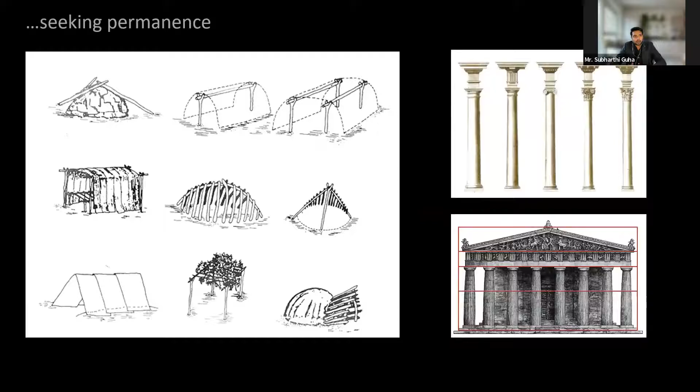So we have created these orders for different needs. For example, from Stonehenge as a monument, to the pyramids reflecting the skies in the way they're managed, to the Colosseum for entertainment, for resting places, for transportation, for houses. And we have moved along across ages trying to do that.

And therefore, it creates a presence in time for us. So I left high school and went in search of the new architecture, what it could be, which took me to some offices, including Charles Correa, Zaha Hadid, and my own. I'll take you a little bit through the journey of the work I've been part of.

As Gandhi once said, the best way to find yourself, or find what you want to do in the field of architecture, would be to lose yourself in the service of others. And that is how building works. You create it, but then it's no longer yours to inhabit - you leave it for the world.

This was one of the first buildings I worked on with Charles Correa, in Lisbon - a Cancer and Heart Research Institute. It's very cutting edge. I worked on parts of the design and helped with the 3D modeling. This was built after I left the project, finished I think in 2014.

When I joined, the office was completing a project like this in Glasgow, a transport museum. The ship is part of the museum, and it's a long, continuous ribbon, so to speak. We were also starting to finish some of the projects in Guangzhou.

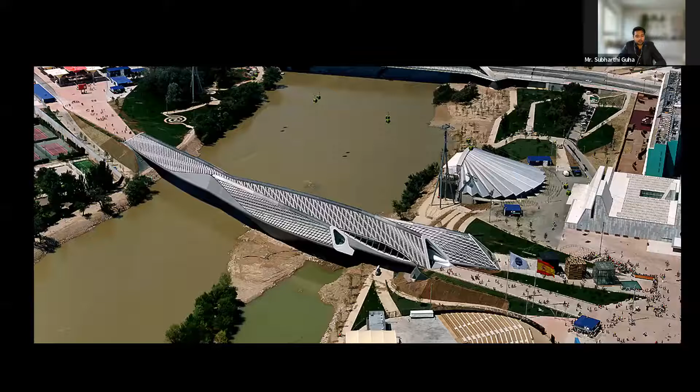This is the Opera House, and then habitable bridges - this is in Spain - and also train station entrances, this one in Innsbruck, Austria, and then the Cincinnati Art Center. So these are some of the projects that were going on.

Simultaneously, there's a factory where the white collar and blue collar workers - the people who work in the office and the people who manufacture the cars - can see each other. It's not separate. That was quite interesting, very different from how we saw factory people and office people as separate entities.

Towards something like the MAXXI Museum, which was very highly appreciated, built in concrete in Rome.

And the Olympic Aquatic Center in London in 2012, built for the Olympics. This is the interior where the event was held. Today it's open to the public and anybody can go there and swim, which is a good use of nice buildings created during a time of an event.

Also things like this, an office building which is a port authority in Antwerp, like a jewel on top of a heritage building.

And also some small projects like the Serpentine Gallery, where the column and the light coming into the building integrate as one piece.

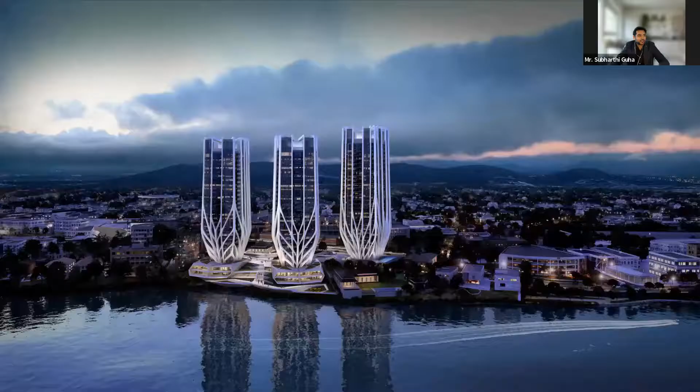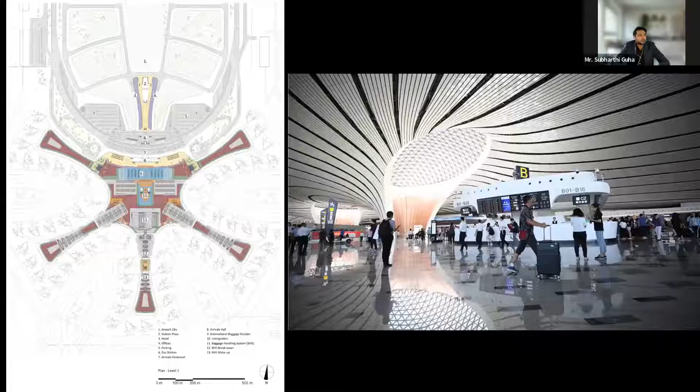And also projects like this, housing which I was part of in Brisbane, and an airport we recently finished in Beijing, the Daxing airport, one of the largest airports in the world, with internal light coming through the columns.

It can be seen in a much larger scale here - that light, people, and the surfaces all behave as one entity.

So, saying this was a glimpse of what buildings can be like in different types, shapes, and sizes, I will go through some projects on how we can build this.

One of the buildings I was part of was in Milan. This is a tower, so there are 3 towers, and we were only working on the tower on the left. The tower is designed with a twist, based on a rotation which is unequal.

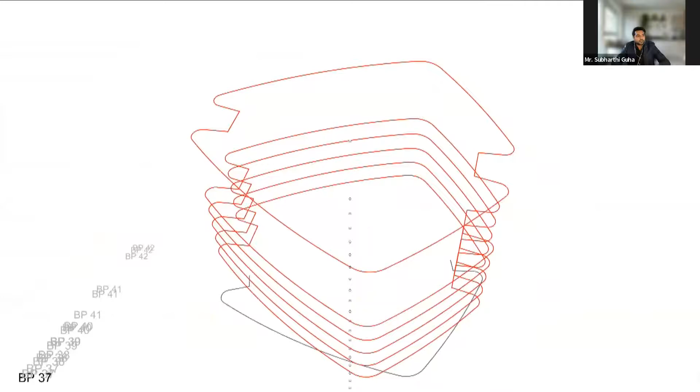As it goes up, you'll see a short video showing how the curves of the growth of the tower, of the twist and the floor plates, are assigned. This is the vertical points, how we distribute it, and then we create these floor plates based on the radiuses, and the whole tower is generated out of that curve.

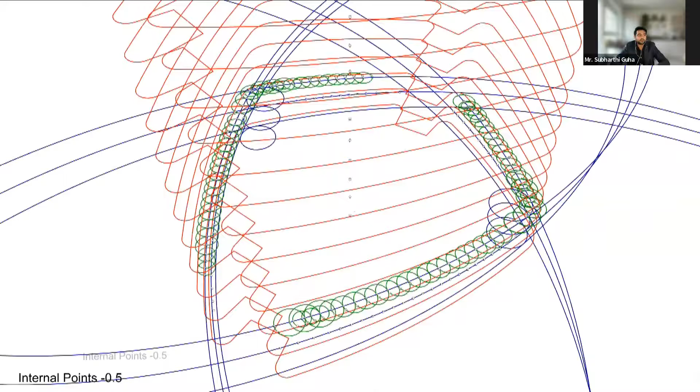I'll let this video run and talk through the technical bits - this is how the glass has been divided. Because every floor plate is different, we try to optimize and make it feasible so that not every glass is different, but we have as much repetition as we can.

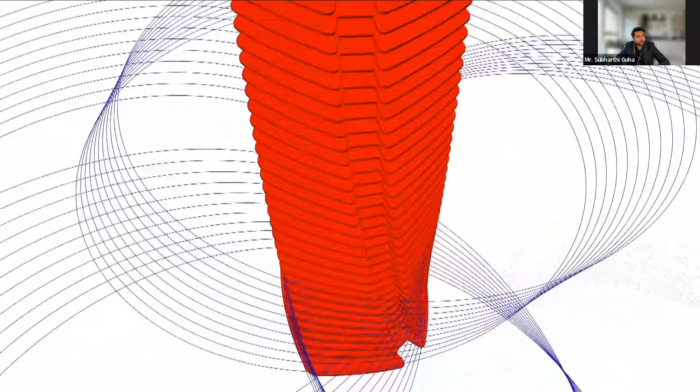So this is all the number of glass points that we would have, and then we start having the floor plates, the 4x4 floor plates. Next come the components of the central concrete columns, and then we have the columns which are inclined - floor to floor inclined - and they build the outside structure.

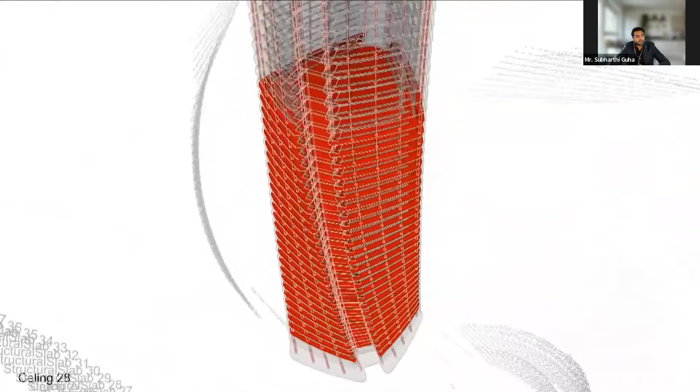The center structure is obviously a core. We also try to rationalize the chill beams, which are for the air conditioning in the building, and then the ceilings of every floor, and together we have...

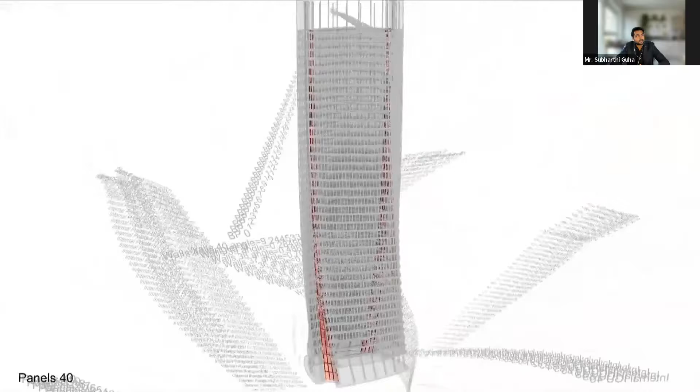Now we start building the facade. There's a first layer, which is the fire seal, coming all the way to the top, closed with panels of concrete on both ends. Then we have a second layer, the single layer glass in the middle, and lastly the outside skin, which is ventilated, reducing the impact of solar gains by having this double skin.

So this is, let's say, the building, and we'll go in a little bit closer. You can see the two skins and how the maintenance happens in between them, and the inside is offices.

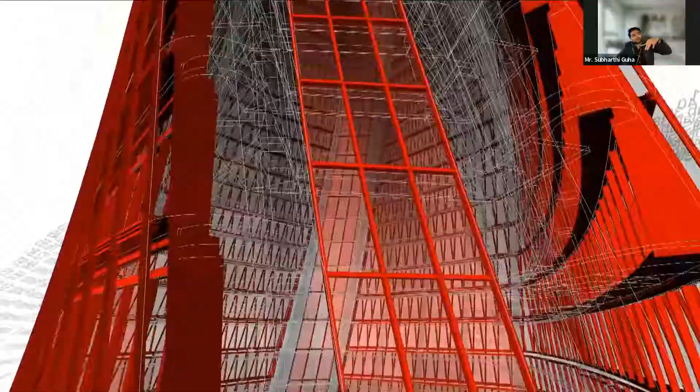So it's a good glimpse of how much detail and work goes into one of these buildings. I thought I'd show you that we took an axis, a metaphorical axis coming from the center of the city, and then you arrive in the first entrance, and the axis is picked up and disappears.

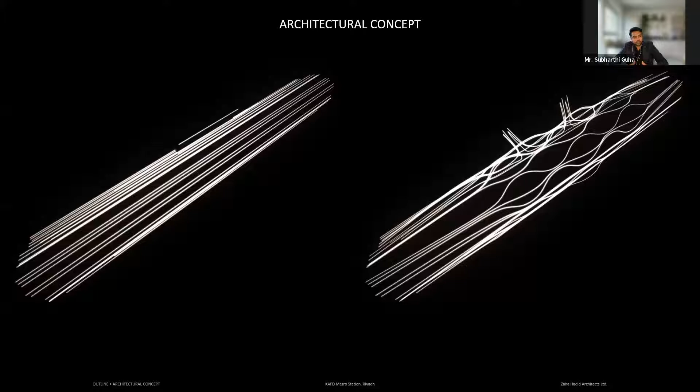But moving on, there's a second building, which is a train station. So we had a vertical building, and now we are dealing with a horizontal building where we have a train station on a very narrow site, and we wanted to give more space. So as you go up, it starts opening up.

This is a competition we won in Riyadh, and I worked on this project for a few years. As you can see, these are some of the initial designs of the entrances.

It's very tight, so you have two layers of trains coming in - one that goes to the airport on top, and one that goes onto the metro. Then you enter on the ground level and have an interchange level, and in some places, when you don't have the trains, it opens up into this large entrance.

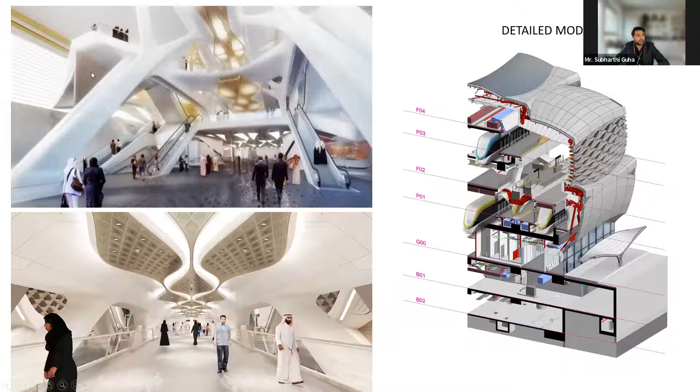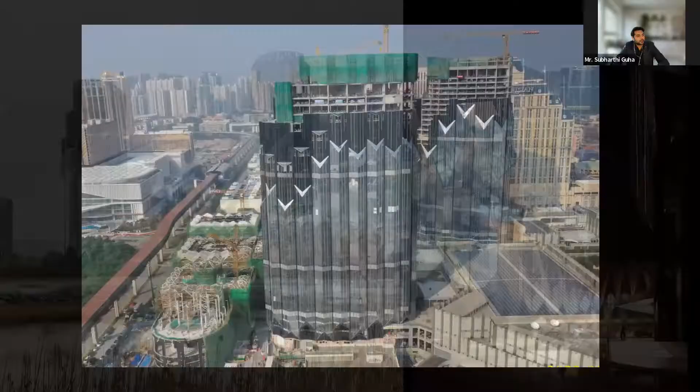Similarly, there's a short one here. This is in Macau, also currently on site. It's a 5-star hotel, then a 4-star hotel, and then a water park. Its whole concept is based on folding. So it's a commercial project, but at the same time we try to do something very origami-like, as a theme. This is one of the construction pictures of its current state in Macau.

Moving on, I think after doing all these projects I started to think about a journey for myself as well, to explore a bit further. So I opened a company and started building with one of these projects, this being one of the first, where this lady is sitting in a place designed not for sitting.

She's just enjoying the sun in Delhi on a winter day in front of an artwork. The building we designed is part of a temple complex. You approach it and you don't see any door or windows like we're used to seeing in most temples. So it's very quiet.

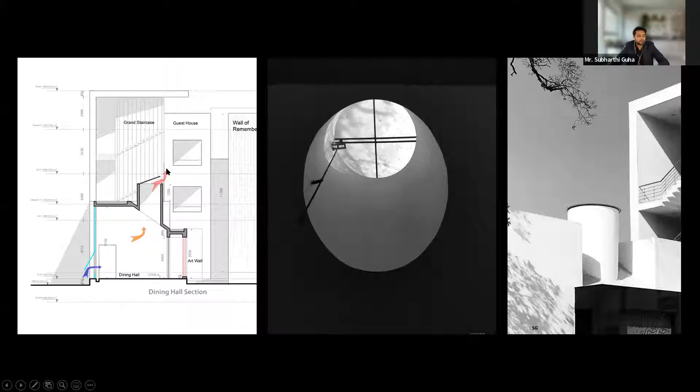It gives a sense of quietness. I like that. It also deals with climate. You have the air coming on the left, which is cool because of the shade, and it goes out through this chimney, which is also part of the architecture on the right. It's a natural passive cooling system. We designed it, we built it.

Next project I will show you quickly. It's got a voiceover, so I'm going to be quiet—you can listen to it. It's in Agra that we built.

Look for constant inspiration in nature, studying the continuity of its curves and the complexity of its surfaces. Translating such forms into buildings is a challenge. High-end computation can make it simpler to analyze and construct around the world. Forms with structures that are proud to reveal themselves. Forms that create new lived spaces.

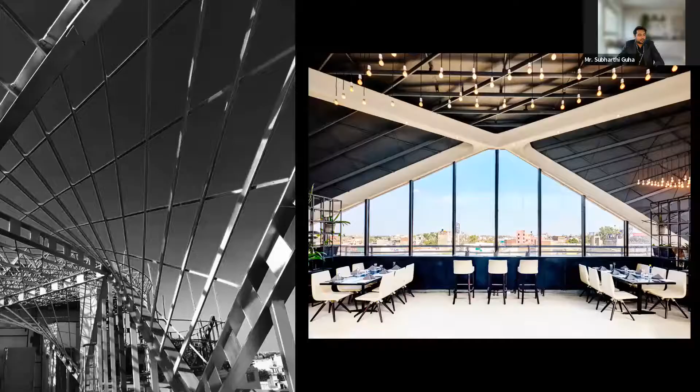So that was the project. You saw how we developed it from inspiration from a leaf into a 3D model, into technical computer-generated models, to finally building it on site. These are some of the pictures. Again, you see it's a little bit different—it does not have a false ceiling, it does not have windows like you know them. It is different in the way we see buildings as transparent, solid, and sometimes in the middle both.

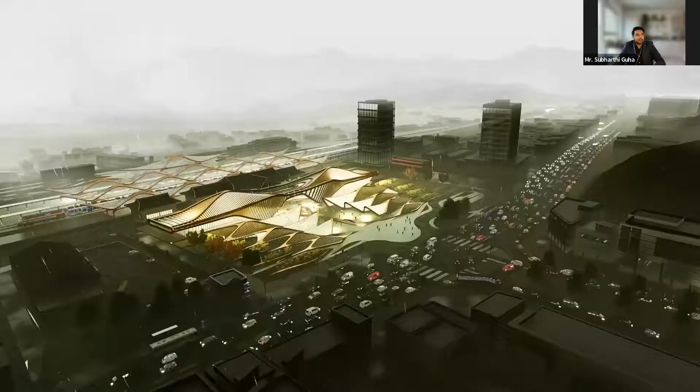And we go into much further details. We go into branding and we go into showing that everything is integrated, from cards. We also participate in competitions.

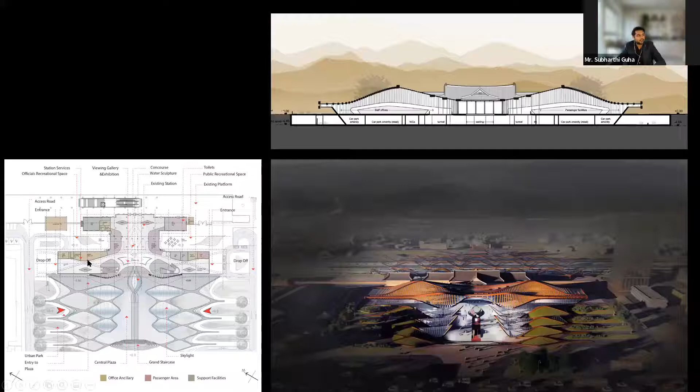We started participating and won—this is in South Korea, where we won some prizes. It's a train station again, but the idea was to think of these hills in the background that you can see in South Korea, it's very hilly. The idea of the geometry was replicating the hill in section, in plan, everywhere, so it's seamlessly connected to its nature.

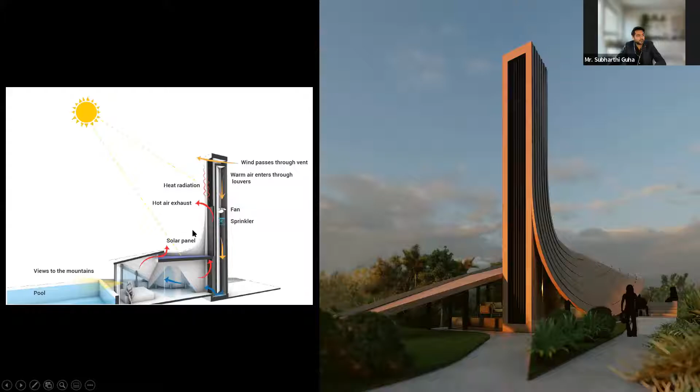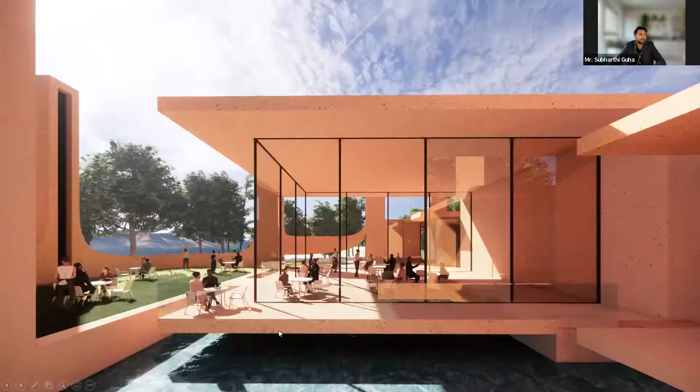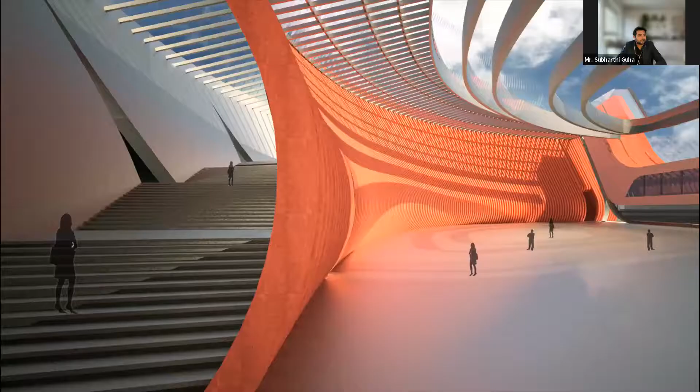Then we look into how art also translates—an exploration in sketches that kind of build something like this, which is a house. Sometimes we look into the night sky, where I started in the first few slides, and we develop a kind of vortex, a canopy. This was in Hisar, and we participate in other competitions like the National War Museum here.

This one is in the UK, a community center shaped like an albatross with wings spreading out like a bird. So this was mostly about the architecture I wanted to talk about, but I want to tell you there is a bit more, and beyond architecture as well, that you can explore in this field.

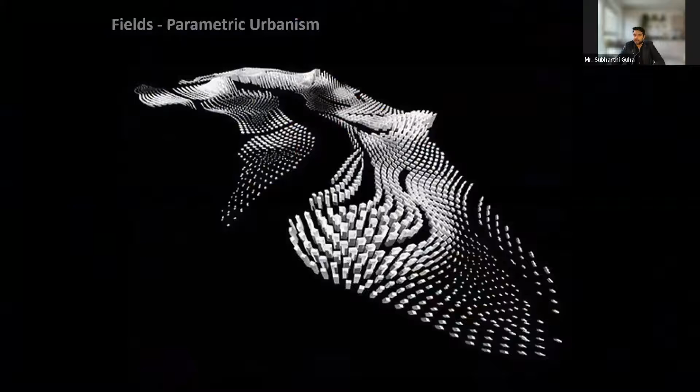You can talk about some of the work that was going on at Zaha Hadid, which was looking into the city, seeing the city as a model, and how the densities can be distributed in the city as a parametric model, which was then realized in the One North master plan in Singapore. And then also something like this, which is in Tallinn, a port master plan of smaller scale.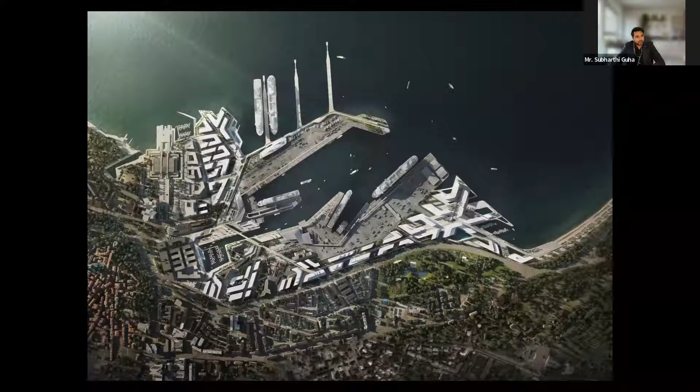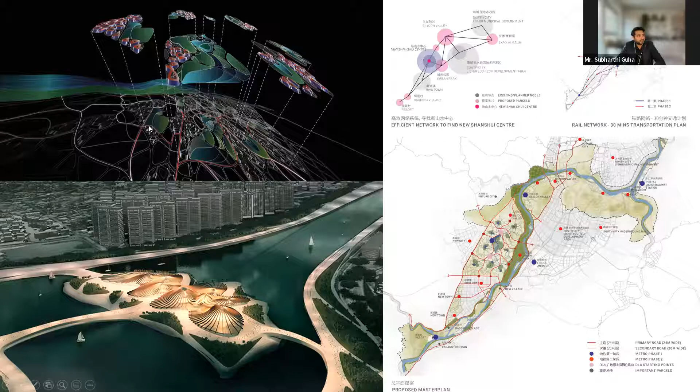And then also my personal interest in cities, we participate in competitions using space syntax, and we competed against Herzog & de Meuron and won the creative prize. This one is a 154 square kilometer master plan in Lishui, China. You can see the overall master plan and how we prepared it. It's beyond buildings, it has much more complexity, transport, and we believe in growth as polycenters, and also how we can create icons at the city level.

So thank you all for listening. And this is me. If you have any questions, we have Instagram and website and all that, but I don't think it's the end. It's a continuous journey, so I think we should all continue towards it. Thank you everyone for listening to me. That is all from my end.

Thank you so much, sir. It was reassuring to know that we are all trying to find order in this world of chaos. You've got us hooked with all the spellbinding buildings and with your architect's point of view, an insider's point of view. Thank you so much, sir. I'm sure it has benefited all the attendees.

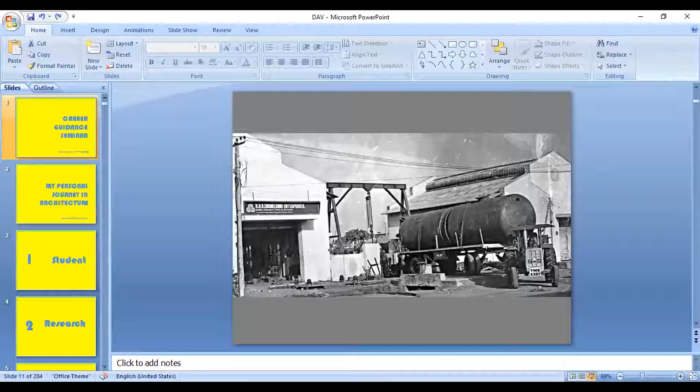So that's what I was just going through. I'm going to talk about different facets in my life and how my personal journey with architecture has been. To give you a little background, this picture is from the 1800s, and it has my grandfather and my great-grandfather in it. I come from a family of craftsmen; our family was involved in making chariots, so we were well versed with working with different materials, say metal, wood, and so on. My father was lucky enough to go to college, and in 1976, he started this factory in Ambattur Industrial Estate, very close to your school.

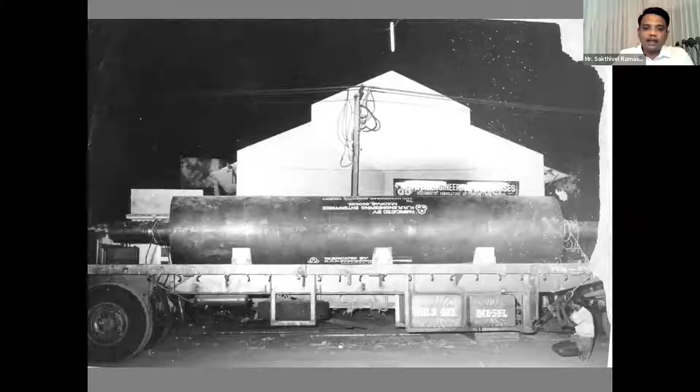These were the different projects he was doing around that time. These were a bunch of very hardworking people doing unbelievable things in engineering. That's my father, who started the factory, and it became a really international organization even at that time. From 1976 to 1996, within a span of 20 years, he won the presidential award. So this is the kind of background I came from.

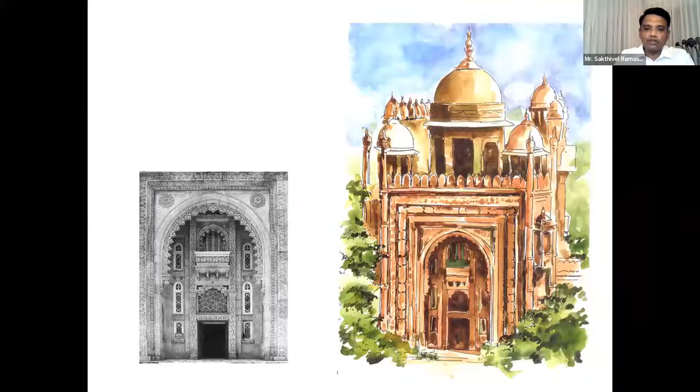As a student, I was really interested in art, so I was very reluctant to even tell my parents that I liked drawings and paintings. I used to go around Chennai painting buildings, go to museums and observe sculptures, and I was part of my workshop. I saw a lot of relatives working with craft, which influenced me a lot. I was also really interested in photography as a young student, walking around with my camera clicking pictures. So I was seeking where these interests could culminate and where it would take me.

That's when I joined CEPT University, Ahmedabad, and that was a real turning point in my life when things started changing, and all my creative urges started to come out and make sense.

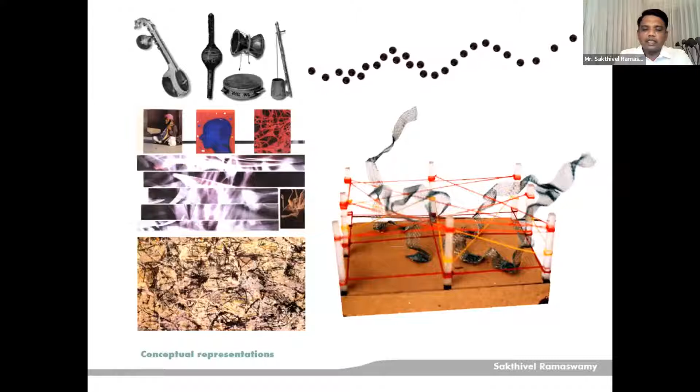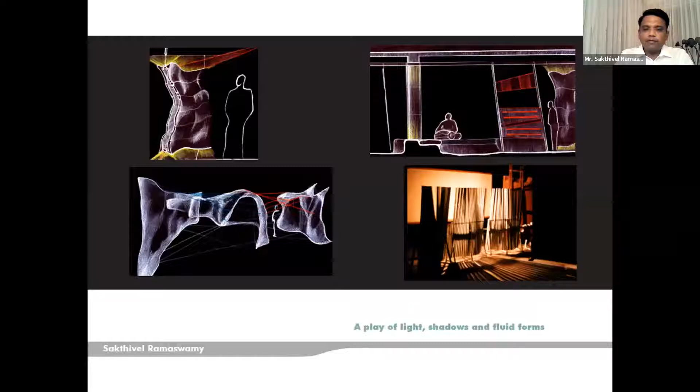I want to talk about a little project I did in college. I'm going all the way back because as students looking to do architecture, I think each journey is important. This is a project where I had to design a showroom for music instruments. We put together a concept board of how music influences our mind, and these are the drawings that were put up at my final jury presentation. I was visualizing the space to be very fluid with a very ethereal feeling when you walk into it. These were the drawings I did as a third year student in architecture.

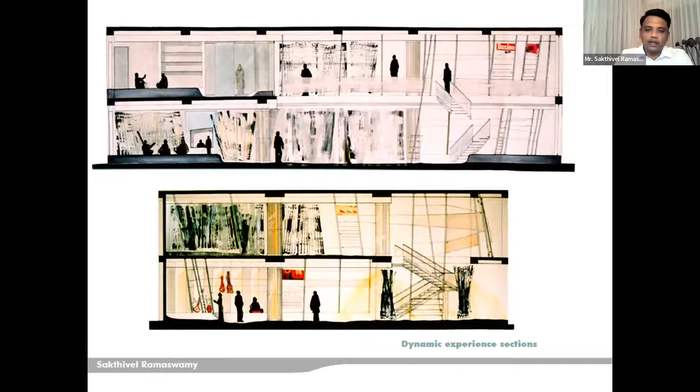These are some of the sections. The concept of the store was that there would be walls which are fluid and which can move with music. So I developed a complete full-scale prototype of how this wall would move with music. This is where I saw there was a huge information exchange - my engineering background and my craftsman background helped me do this in school. This was a really well appreciated project at that time.

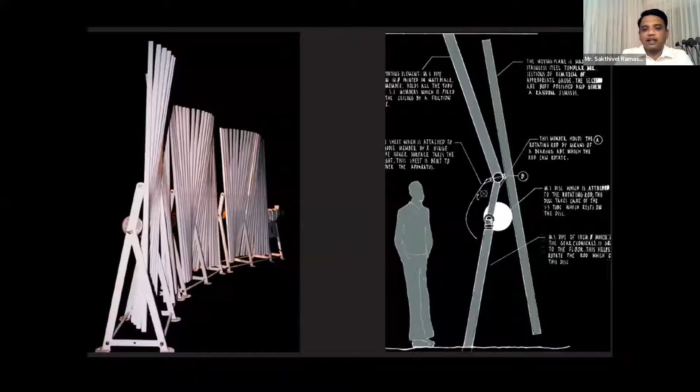So there was a lot of influence from my background. These were the images of the facades at that time, and this is the image of the wall that could move. The whole wall was engineered and done with the frequency of the music - the wall could actually dance along with the music. That was the concept. So from there on, I went to do my master's in London.

I did this course called Emergent Technologies and Design. Talking about research, when I was towards the final years in my undergrad education, I got really interested in how nature influences architecture, how nature influences design. So I delved a lot into the subject.

As much as I was trying to seek more meaning into how nature works, how nature can adapt, how nature is smart, and how nature is efficient - all this led to furthering my research even further, and I published two books. One was called Biomimicry, and the other was called Fiber Composite Adaptive Systems.

To touch upon a little bit of bionic smart adaptive systems, which influenced my research - bio means life, which is there in every scale on this planet, and nic is like lifelike, so bionic is lifelike. This is also an anagram of biology and electronic. This is a Rex man-machine robot, which is displayed in the London Science Museum. Talking more about bionics, there is a space where we no longer differentiate between what is human and what is electronic - it's really pushing human efficiency to its boundaries.

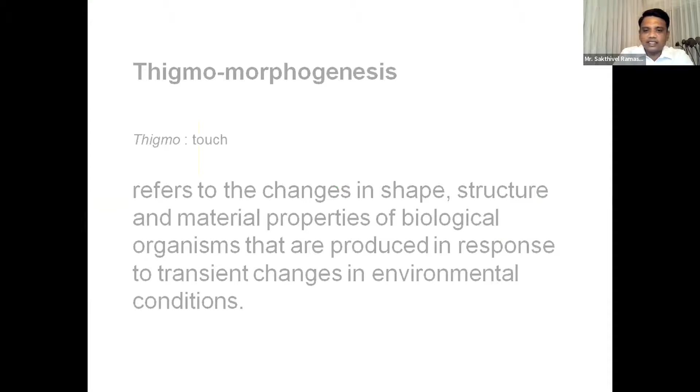This is what you observe in nature, a process called Thigmo-morphogenesis. When you touch a touch-me-not plant, it closes to touch, or roots wind around a support. Heliotropism is when plants move towards sunlight, flowers bloom for sunlight, and the Venus flytrap traps a mosquito. There's amazing technology in nature, and my research took me deeper into these areas, a process called morphological computation.

If you look at a leaf, it doesn't only hold the shape of a leaf, but is also part of the structure, part of the geometry, part of the function, and even the life of the leaf is embedded into one material. For example, a cross section of a stem is packed with xylem and phloem cells, acting as structure while also transporting nutrients and water. It's integrated; you cannot partition it in any way. This influenced a lot of what I was doing in research.

In nature, you observe multiple levels of hierarchy. Nature has very little material, but it manifests in very many different forms.

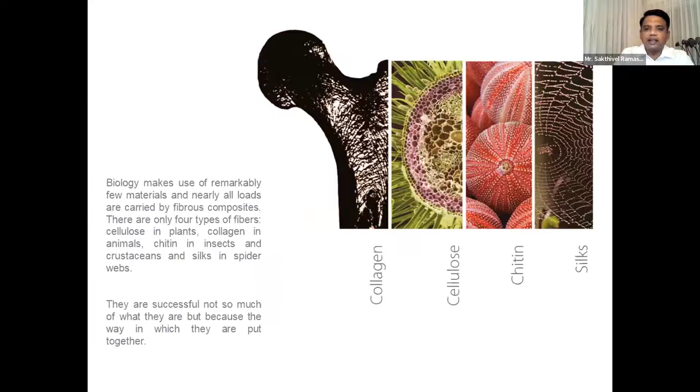Looking deeper into the nanoscales of nature, you see amazing hidden intelligence called emergence, seen in self-organization in many forms: flocking of birds, schools of fish, rock formations in nature, a Romanesco broccoli with amazing embedded mathematics, a river valley flooded in a completely decipherable way, and thunderstorms and lightning showing patterns with some kind of order in them.

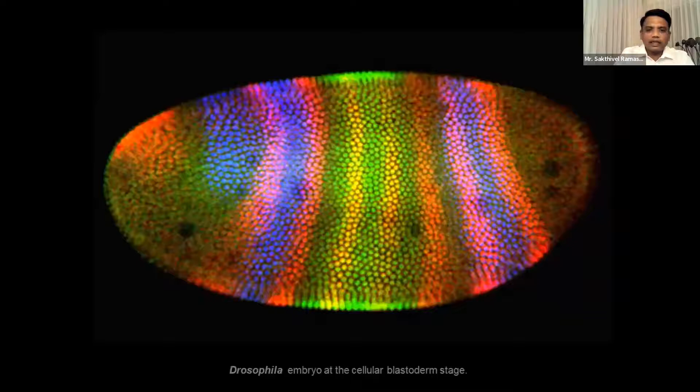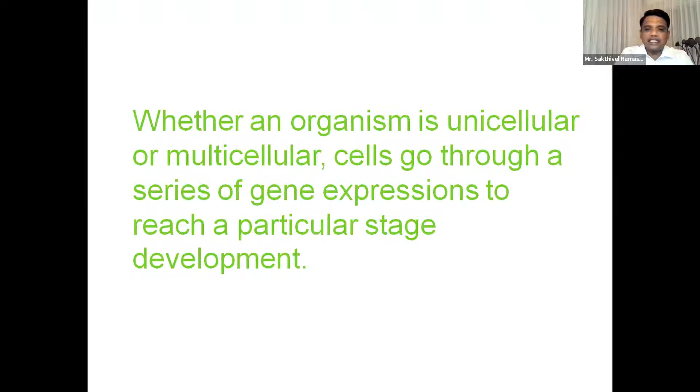These things influenced me. Going further, I'll take you quickly through how a single zygotic cell gets differentiated into multiple organisms. Whether unicellular or multicellular, cells go through a series of gene expressions to reach a particular stage in development. This is a fruit fly, which has multiple sections of genes.

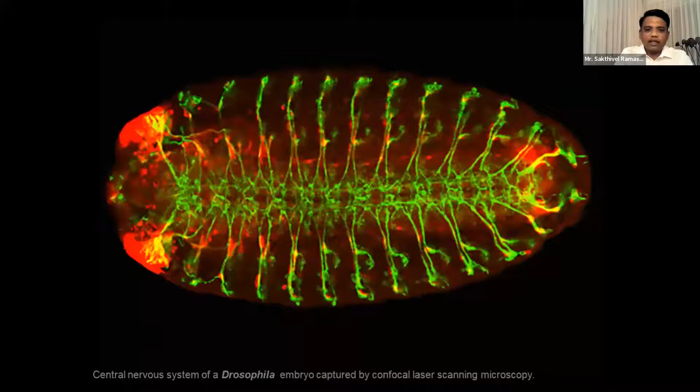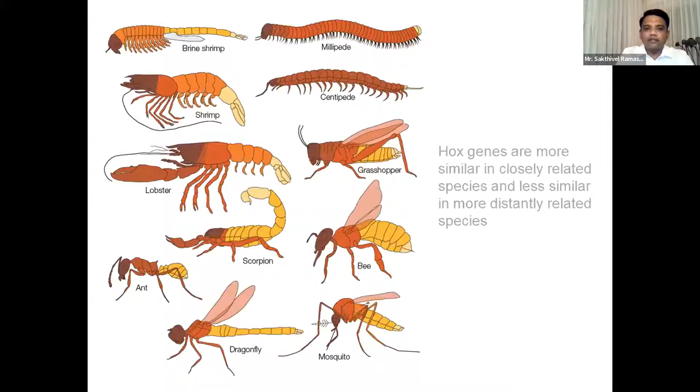Just by reorganizing these genes, we see multiple forms in nature, as in this embryonic development of a fruit fly. Just like how words make sense depending on where you put 'the', that's what happens in nature, leading to different forms: limbs, heads, thorax, and legs. It's just how you multiply those that is important.

If you see the DNA of humans, it's 90% similar to that of a cat, 80% similar to a cow, 75% to a mouse, and almost 50% to a banana. It's just that how we are put together is different.

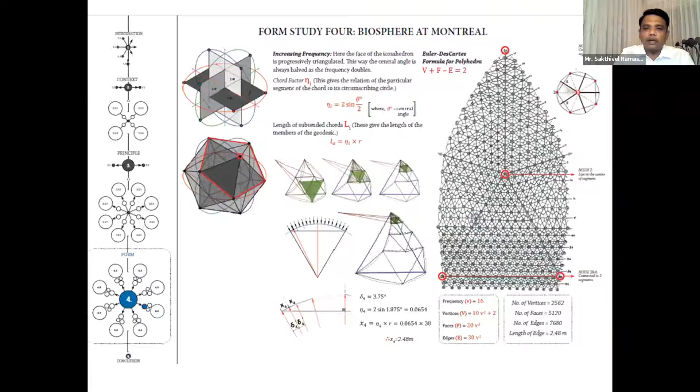So these are some of the research theses I've guided in mathematics and how it influences design and architectural spaces. The next section is I go to academia, where I work as an adjunct professor at CEPT University for a while, and we had to put all these ideas to use.

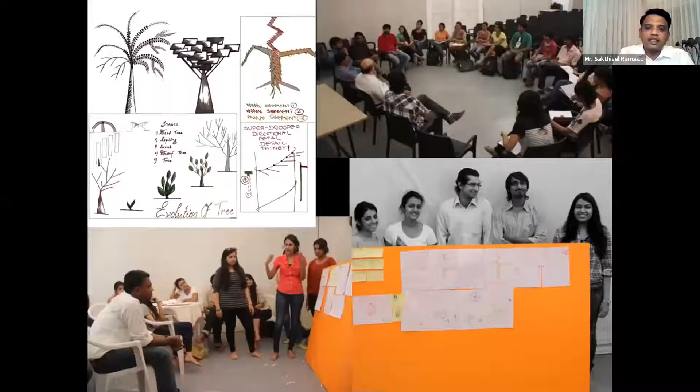So there I conducted a workshop which lasted about 3 months, where we developed some adaptive systems. Here are a bunch of students I was working with, from different years, first year, second year, up to fifth year, and we put together a bunch of ideas.

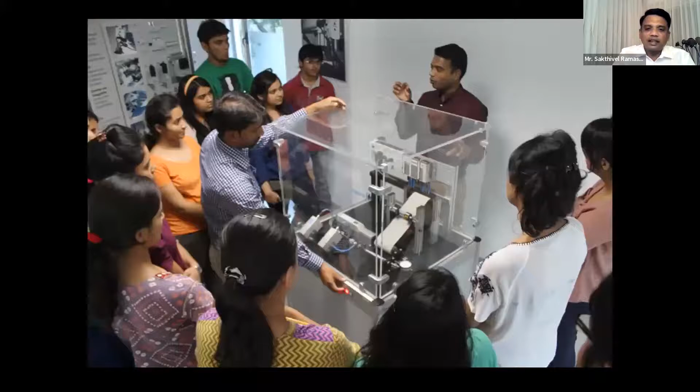And we came up with this installation, an intelligent art installation, where these trees communicate with each other and can monitor how many people walk through it. Based on that, they go happy or sad depending on how many visitors they have. This was called Talking Trees.

I'll just show you a little video of what we did.

That was one of the art installations that I got the students to do. And the next one is another interesting thing, called the Unfurling Fern.

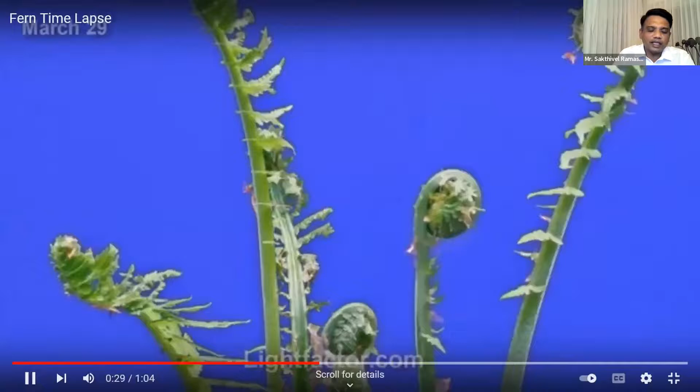Such beauty, it's just a huge task to replicate something like this. We somehow managed to scratch the surface of it in the 3 months we had with a bunch of 15 students. I'll just show you. So this is the Talking Trees.

So that means you also didn't see the Festo video? No sir, no sir. Okay, just a minute.

So this is the Talking Trees.

So that was the Talking Trees, and this is the Festo, showing how it imitates an elephant trunk.

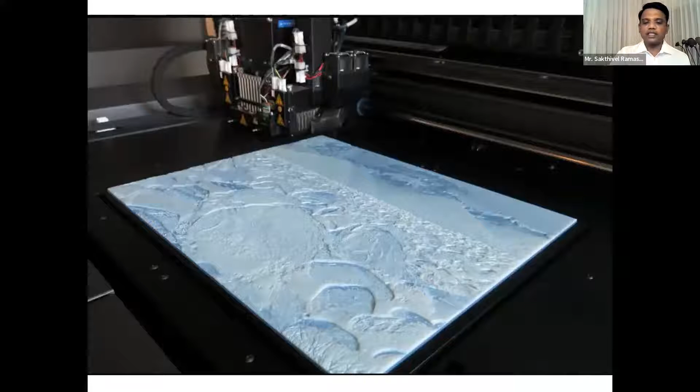So we chose this material called Corian, which is essentially an acrylic plastic. We were doing a lot of CNC engraving in it, which also got the students introduced to how engraving happens on Corian.

It's got a very ethereal quality about it. The way light filters through it is amazing, and you can make beautiful textures with this material. So we were thinking of how to encode data into this material.

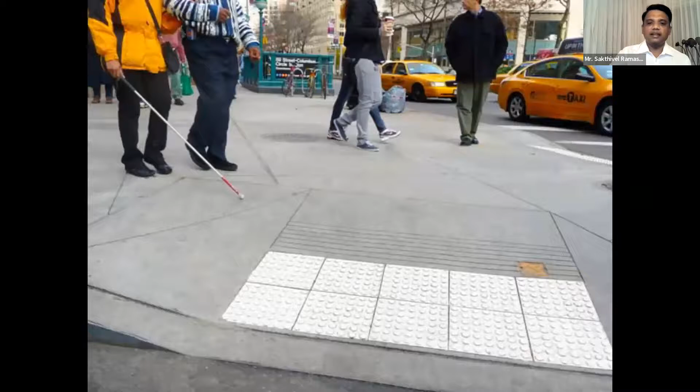If you see, this is tactile paving used by blind people. So we thought, why can't we embed this kind of knowledge as data inside the material? The project was then driven towards a brief of making something for blind people.

The brief given to the students was how an aquarium would be experienced by a blind person. This is what you see with eyes—can we replicate this with textures and forms, something blind people would enjoy?

So then we actually made it into a reality. This project went on for a span of 4 to 5 months, and we got sponsors to sponsor college students. We made a team with the Blind People's Association, and I'll show you a little video of how the students constructed this.

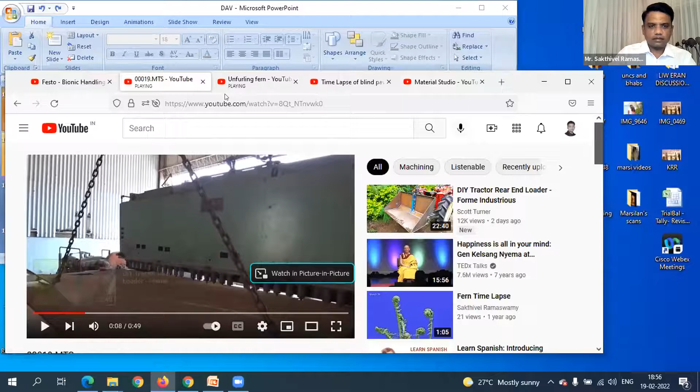This was in the year 2014. All the design was done, and the students were building it in a span of about 10 days. Just fast forward a little bit.

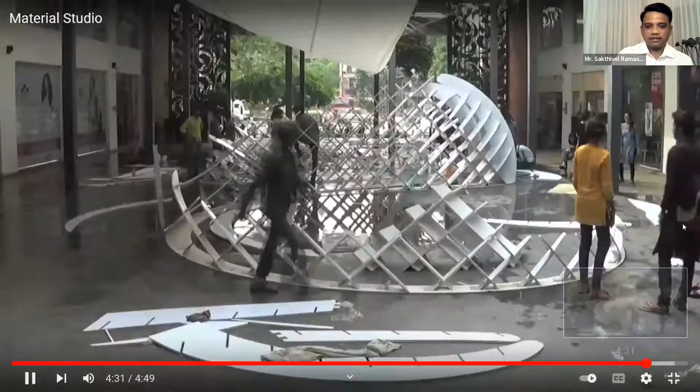So this is the little structure. Our dean, Mr. Bimal Patel, who's designing the Rajpath in Delhi and the Vishwanath Mandir, was very much there, and it was inaugurated by the president of the Blind Association. It was a moment to cheer.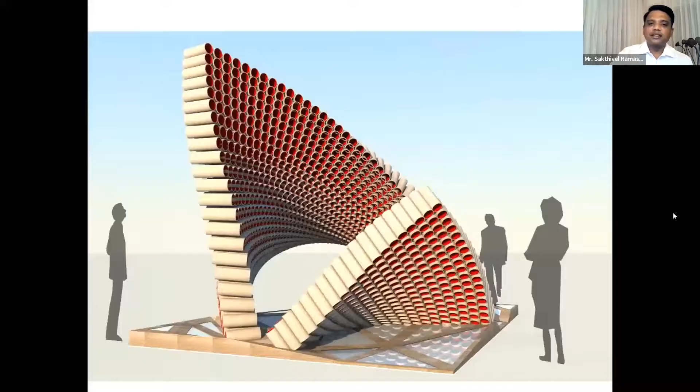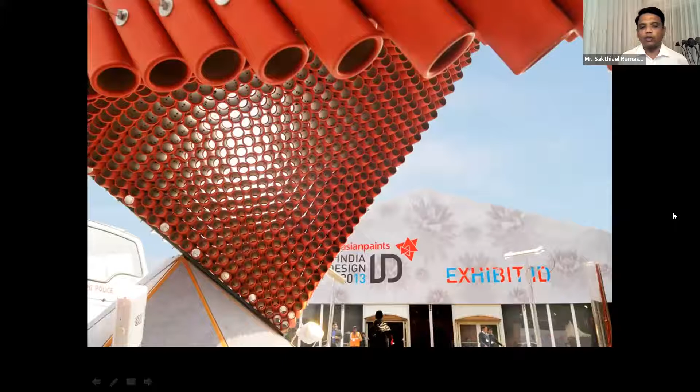Later I floated my own firm called Bio Inc, where I was looking at eco-friendly materials and exploring paper as a material to construct. This process culminated into an exhibit that I did in Delhi for India Design in 2013, where we put together a whole system of how paper tubes can be connected together and made into a building. This was my own venture.

So I had my team who I was working with, and this also got widely published in design magazines in the country.

After all of this work, I had to come back to my family business because my father had invested so much time and energy in it, and he wanted somebody to take care of it. It was a pretty different move that I had to make, but I went back and got my business degrees, returned to the company, turned it around, gave it a new image, and brought all the architectural knowledge I had into infrastructure building for the company.

Now the company, what you saw in 1976, that place is now this place. This factory is spread about an area of 6 acres. We expanded in a great manner and did a lot of interesting engineering projects.

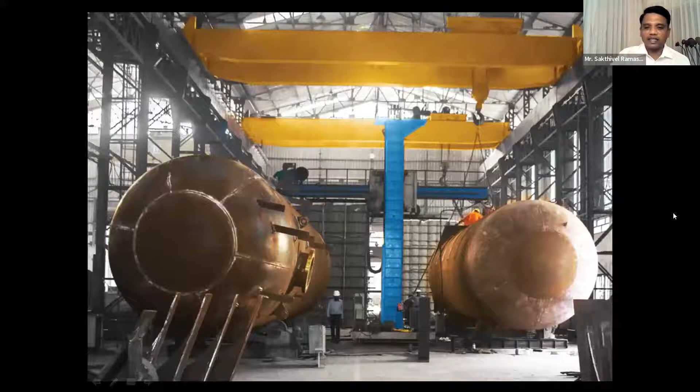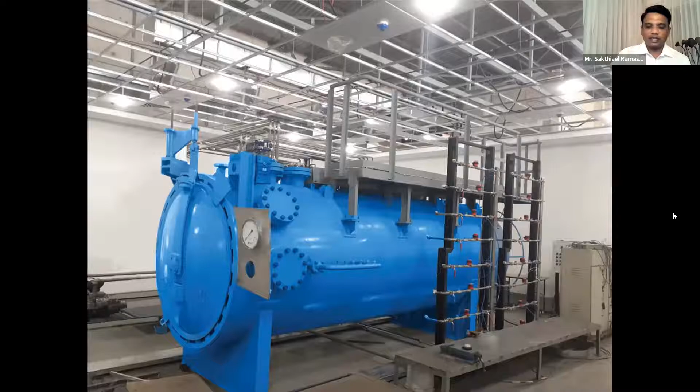These are the projects which we are currently doing in the factory. We introduced avant-garde technology, robotic welding, and signed technology agreements with some great researchers in the country, like CSIR and National Aerospace Laboratories. There was a great influence of architecture that helped me support and achieve all of this. This is another equipment that we are doing.

When there was a requirement for oxygen, we floated a separate business called KRR Oxygen, where we were supplying oxygen cylinders. We also delve into a lot of virtual reality in our projects.

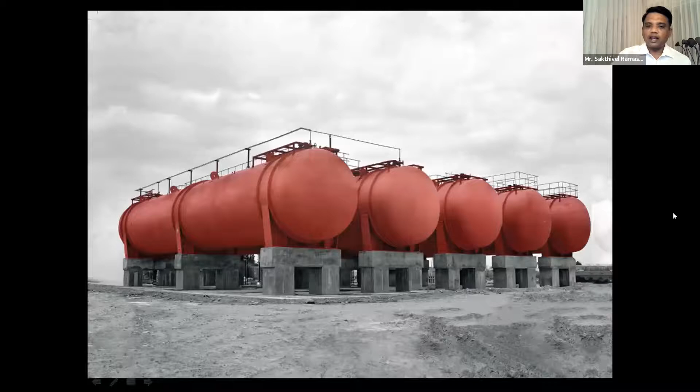These are some of the large projects that we have installed in the country and abroad. We do a lot of work with overseas customers, so we now have customers all over the world, be it Chinese, Japanese, Spanish, Italians - name it and we have it. Now we are exporting to more than 30 countries, and last year we won the export award from the Chief Minister of Tamil Nadu. So the team, what it was in the 1970s, is now a team of 200 efficient staff and more than 300 workers, and we are supporting almost 1,000 people in very close quarters.

I think my background in architecture helped me understand how creativity can be injected into engineering. So it's a very different approach, and I really am glad that I went through this process.

In general, in life, what got me into architecture, what interested me, was appreciating good work, creativity. So I got the opportunity to travel around the world, appreciate great things, click them into pictures, appreciate beautiful architecture, visit many museums, look at brilliant art, which I was always in awe about.

It's so ironic - Subharthi also showed this same painting that I'm having a picture next to. And I got to see the masterpieces, the Mondrians and the Matisses and the Picassos, which is an inspiration no matter what you do. And I got to see the world's best sculptures and understand and appreciate them in a way I could not have if I had not studied architecture, if I had not stepped into architecture.

Good evening to one and all present here. Thank you, Ms. Silpa ma'am, and thank you for the wonderful opportunity, Ms. Radha ma'am. Thank you to the panelists, Mr. Subharthi ji and Sakthivel ji, for the presentation of architecture as a career and the various avenues that we can take forward as a student, and myself as an undergraduate currently. So let's move on to seeing architecture as a course.

To give a small introduction, I believe currently the attendees are mostly students, and with the current question of what to choose after 10th, we'll begin our journey of this presentation. So what stream to choose after 10th standard?

The minimum standard as per the requirement of COA is that the eligible candidate to appear for architecture entrance examinations should be particularly a science stream student currently, with maths, physics, and chemistry as subjects and a minimum of 50% aggregate in scoring. Earlier, up to 2015, if I'm right, there was allowance for commerce and humanities students to appear for architecture examinations. But this was changed with the 2018 amendment, where the council sought to make the course technically sound.

And if not for a high school program, it is also fine to pursue a diploma with 3 years validity and mathematics as a compulsory subject. Similarly, 50% marks is compulsory.

In my journey as a student from 10th standard, I had the option to choose between computer science, biology, and engineering graphics, being one of the different programs offered in DAV group of schools that is not found in many other schools. So I chose engineering graphics as one of my subjects along with the science stream group, as it helped me gain the perceptive knowledge that is very much necessary as a first year or beginner of architecture course. The subject dealt with the knowledge of perception, the understanding of shapes, forms, and other diagrammatic problems with solutions very much needed for one's understanding.

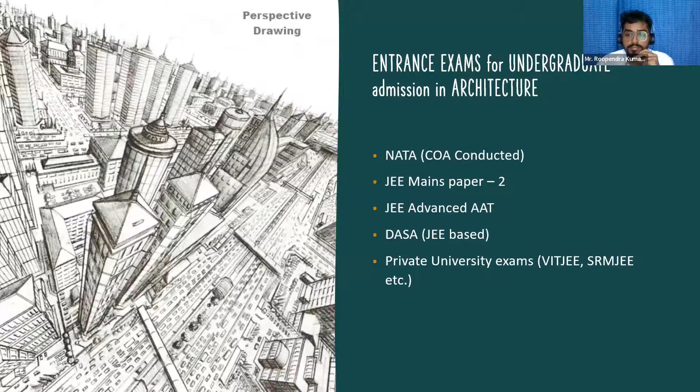Coming to the NATA exam pattern, the assessment categories will be on diagrammatic reasoning, numerical reasoning, verbal reasoning, inductive reasoning, situational judgment, logical reasoning, and abstract reasoning. While diagrammatic reasoning and numerical reasoning are separate sections, the other sections combined come under logical aptitude tests.

The number of questions asked in the NATA question paper will be 125 questions, and the total marks will be 200, with a pass percentage of 80 marks minimum to be eligible to appear for counseling in various architecture colleges.

The type of questions will range from multiple choice questions to multiple selection questions to preferential choice questions and numerical answering questions. The language is basically English medium, and the marking scheme will be 1, 2, or 3 marks. There's no negative marking in the NATA exam paper.

With that being said, the next topic is the JEE Mains Paper 2 pattern. This examination is taken for admissions into all NITs that provide architecture as a course, as well as the SPAs that are primarily dedicated to architecture and planning studies. The number of questions in this category is 82, subdivided into mathematics, aptitude, and drawing.

The assessment categories are quite similar to that of NATA. The overall marks have been upgraded to 400, while when I was writing it was only 360 marks. During the COVID scenario, drawing was dropped as a question, but aptitude and mathematics were there. With the current planning scenario, the National Testing Agency has said that drawing will be included in this year's paper as well.

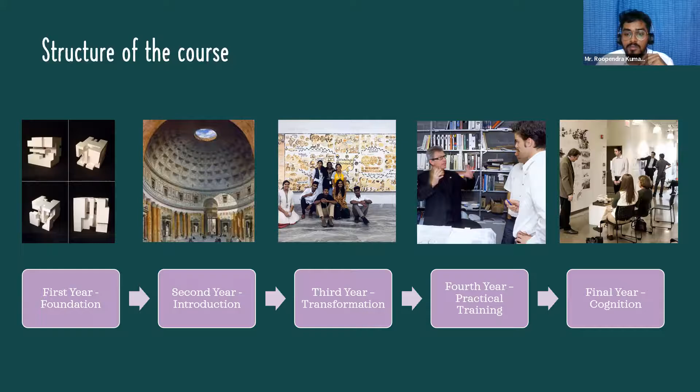As a course, most of the learning happens within a space called studios. While technically most colleges have only classrooms and laboratories, architecture schools have a studio, classroom, and laboratory. The studio is where most of the design knowledge is taught, experimented with, and evolved.

The studio has been set up along similar lines to what one will face in practical life while working in a firm. So what happens is every year or every semester, one is introduced to a design problem where one has to come up with a solution.

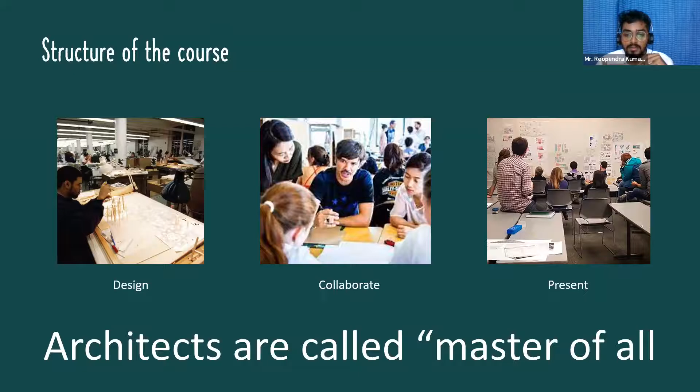One of the beauties of this subject as a whole is that there's no one particular exact correct solution. Each individual is capable of generating more than one or two solutions for a given problem. This is evolved during the design courses, and it reflects in our practice as well. There is a saying that architects are masters of all trades, which well suits from learning to the practical stage.

Coming to student body organizations, architecture as a community has been well established and well connected right from student ages. While the Council of Architecture focuses on the practice and professional part, there are student organizations like the National Association of Students of Architecture, Ethos, and the student member body of the Indian Institute of Architects that focus on involving students, raising their voices and concerns, and educating them with workshops, conventions, lecture programs, competitions, and so on. This creates a networking solution that helps students connect with others from any part of the nation and even internationally.

As said earlier, while research and internships are well-known aspects in all fields, architecture competitions also play an important role in helping us exploit and explore our knowledge further. Every year there are several competitions for architects, from both government and private sides. Governments themselves come up with project proposals to construct, design, and give solutions for existing problems prevalent in the country and internationally. These are golden opportunities for students to learn, unlearn, and explore more into the field of architecture.